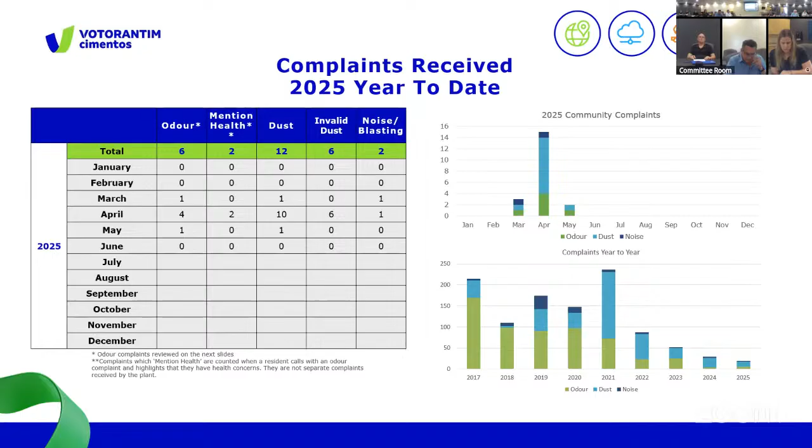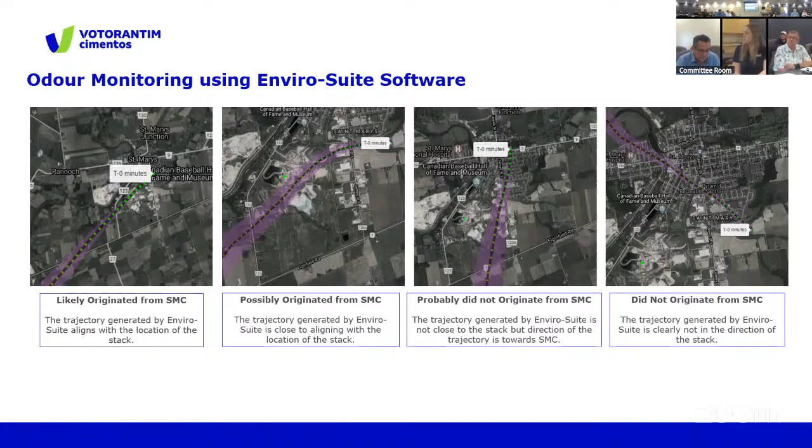Specifically looking at our odor concerns, we are still using the Enviro-Suite software, which helps us validate concerns received by residents when it comes to odors. The software will categorize them as either likely originated from our facility, possibly originated from our facility, probably did not originate from St. Mary's Cement, or just generally did not originate at all. So on the next slide, the 6 concerns we've received this year.

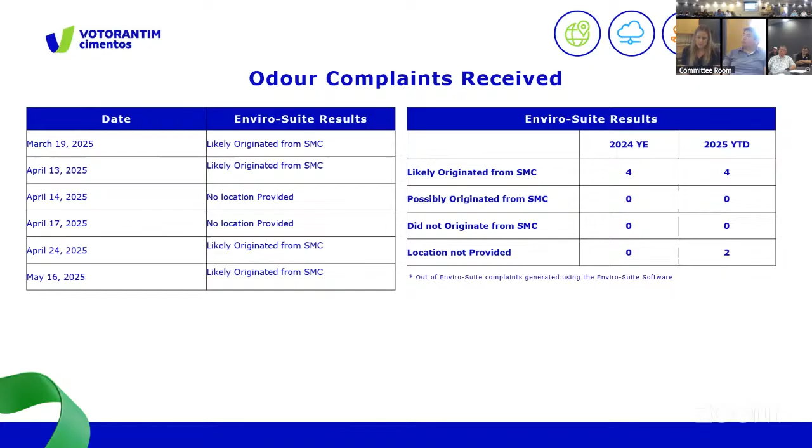The first one in March likely originated; April 13th as well. We did receive 2 concerns, April 14th and 17th, where the resident did not provide specific locations. Just a reminder for everyone that anyone with a concern should please provide that location, as we use it for the software. Towards the end of April, we had another one likely from St. Mary's, and then in May we had 1 as well, likely from St. Mary's. For 2024, we had 4 for the entire year. For 2025, we've got 4 that likely originated and 2 where they did not provide locations. That's on the next slide there.

It's okay. Just go back a few.

Any questions about the odor concerns? Okay.

Dust concerns: in March, we had one that originated from our facility. April 19th, two that did not originate from our facility. Towards April 28th and 29th, we received a whole bunch that did not originate from our facility. I can't pinpoint what it was, but there was a lot of farming and dry weather within that week period. On the 29th, we had 3 that originated from our facility. We also had an event we noticed on that date, so that was a fairly evident one from us. Then towards the end of April, start of May, we had one that was a combination of our material with other material that was not ours, but we worked with the residents for that one as well.

Comments about the dust concerns? Okay.

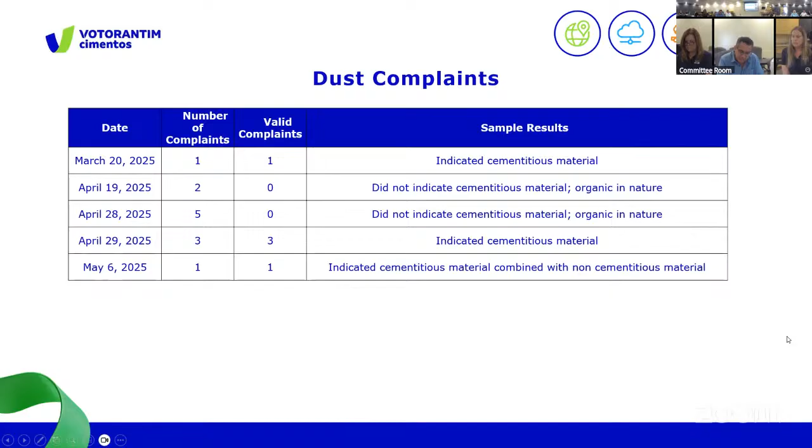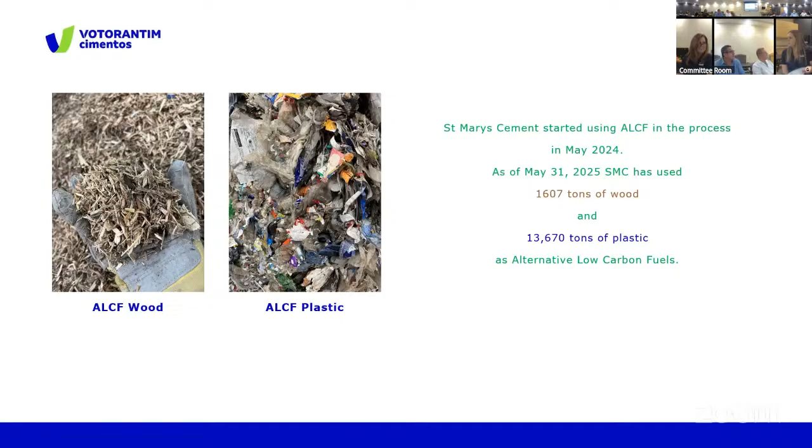Alternative low carbon fuels. As a reminder, we started using these fuels May 2024, which means we've been using them for a full year. As of the end of May, we have used 1,607 tons of wood and 13,670 tons of plastic.

On the next slide, I updated my calculation. I was using engineering practices math, but then I was able to count the trucks, so this is a more accurate number. We've used 647 trucks worth of plastic and 57 trucks worth of wood. Again, these are materials that are sorted, separate from the recyclables. These are materials that are non-recyclable or reusable, and they are sent to our facility to be diverted from landfill.

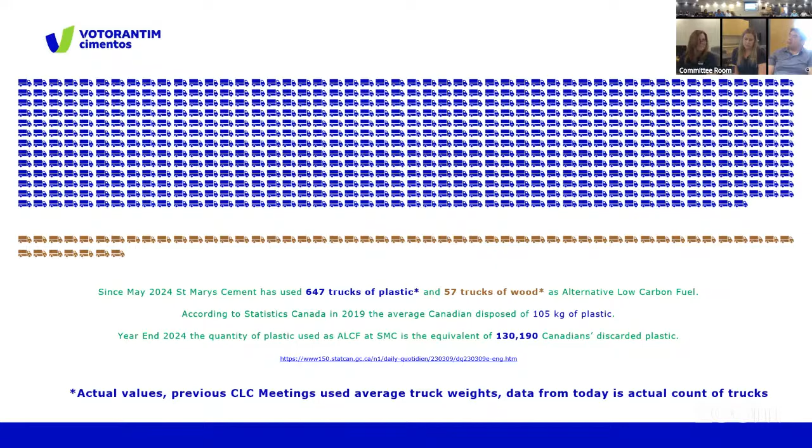On the next slide, we have a new graph. According to Statistics Canada, in 2019 the average Canadian disposes of 105 kilograms of plastic per year. So looking at the full year that we've been using alternative fuels, we have used the equivalent of 130,190 Canadians worth of plastic material. I put this in a different format because that would be a lot of little Canada flags.

Average Canadian or the average Canadian household? The average Canadian. Wow, and that was 2019 - I don't know if it's changed.

Excuse me, Karen - the number of truckloads of plastic you're using, I realize it's probably more available, but is it the heat value that's there, or is that just what's available, so that's what you're using? I thought you had to make a mix, a certain combination of materials. So the plastics we're receiving do have the heat content we need, and we would typically blend it with the wood. I think it's about the same as pet coke, a tiny bit smaller, but fairly close.

The consistency and quality of the plastics we receive doesn't require blending because it's very consistent - a few variations, but not significant. So we don't need to do additional blending; we just process the material as it comes to the plant. When we need to blend is when we combine with wood, but if not, the plastic goes straight to the system.

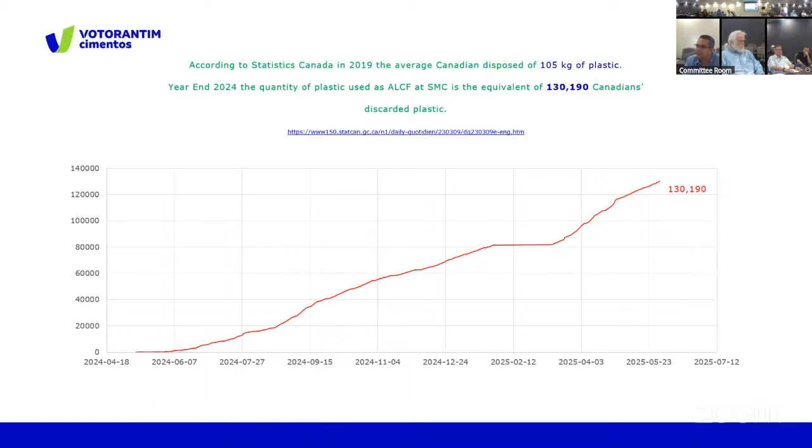So yes, there is a portion of our materials coming in that are alternative low carbon fuels, but in terms of the overall truck traffic, I don't think it's a substantial increase relative to years prior to using alternative fuels. On average we have 5 to maybe 6 trucks per day, and the deliveries are from 8 a.m. to 3 p.m., Monday to Friday. So far the deliveries we're having are no more than 6 trucks per day on average.

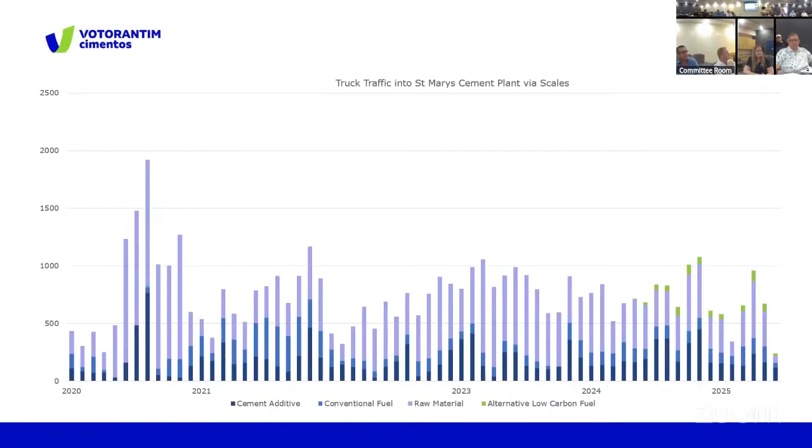Like I said, I'm Jimmy. I've worked for St. Mary's, or Votorantim, for 11 years now. So 9 years in the ready mix business, which is what you guys know as the concrete business, right? And now I'm on the cement division, so working with you guys.

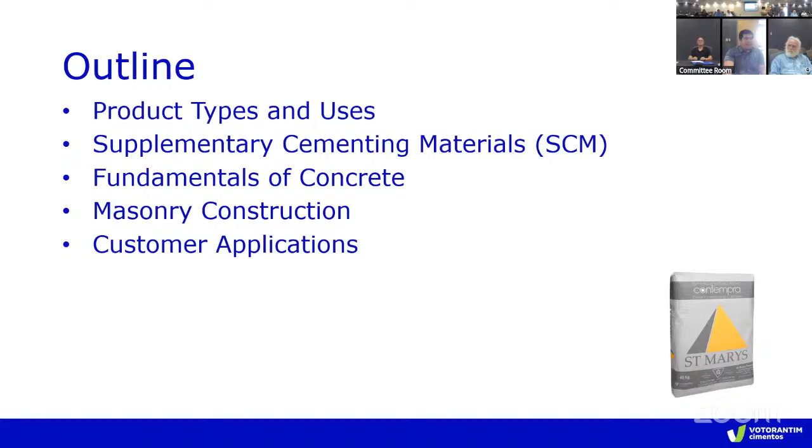Okay, you can skip the next slide. So today, just to outline, we'll go through the product types, the different types of uses, and supplementary cementing material, which is what we use to substitute it. Then we'll go into the fundamentals of concrete, some masonry construction, and some applications that you commonly see.

Moderate sulfate and high sulfate cements are, like the name says, for where it's high in sulfates—your wastewater treatment, your sewage, and such. Moderate heat and low heat is for mass concrete, so big applications like dams, which could be up to 3 meters thick, or any kind of big crane bases. Even other applications where it's really high heat, you might have to use a low heat cement. In Canada, we don't typically have that.

We use supplementary materials to achieve that instead. The other one is your high early strength, which is usually used in precast applications where they need a fast turnaround. The one I don't like to mention is for road work at night—you close a strip, go pour it, and the next day you can drive on it. It's very innovative, but it's also not so nice for me.

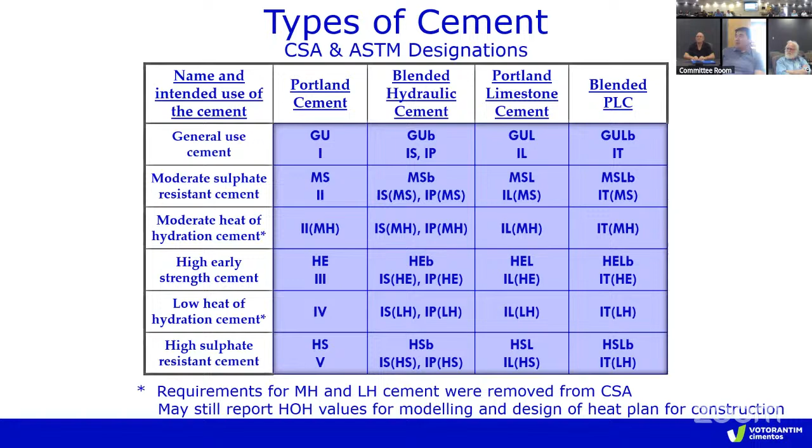Just a quick note on this. We are the only plant in VCNA that produces the 6 different types of cement we need for all these blendings. The other plants we have in Charlevoix, in the US, in Bowmanville, or in Quebec, they produce just 2 or 3 different products. We are the only plant producing 6 different types of products for all these blendings we need to do for the concrete.

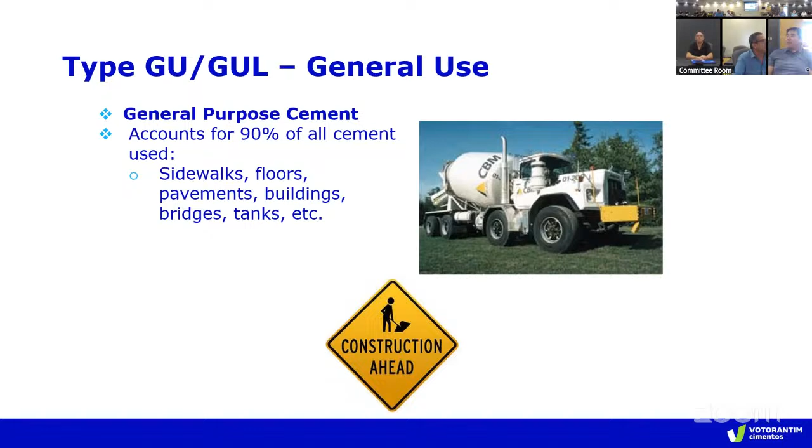So I kind of touched on that. GU covers about 90% of all cement used, right? Go to next.

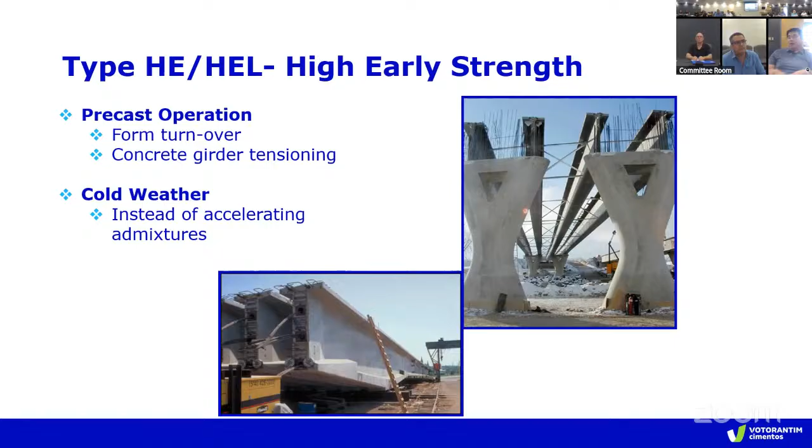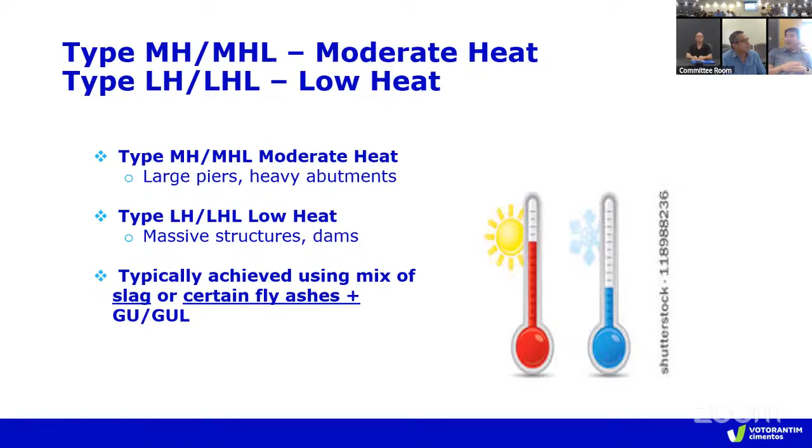High early is used for precast operations. Cold weather is another one too, especially with big condo construction, where you want to accelerate the schedule. Moderate heat and low heat, we kind of touched that as well, and you can achieve that using slag and certain fly ashes with GUL. Moderate sulfate and high sulfate are again just for areas with high sulfates, so it could be for drainage structures, groundwater structures, soil, etc.

So in general right now, supplementary cementing materials, fly ash, are harder and harder to find. Good quality fly ash is harder to find. Slag is very closely tied to our steel industry, and as we convert from blast furnace slag to arc furnace slag, you won't have that slag you can use. So we're starting to try to find, or VCNA at least, yeah I can say that, we're trying to find different ways to continue to be more green. So we're really working on natural pozzolans right now.

Can you just elaborate on what exactly fly ash, silica fume, and slag are, and where they come from? Okay, so go back. Oh, you do have slag.

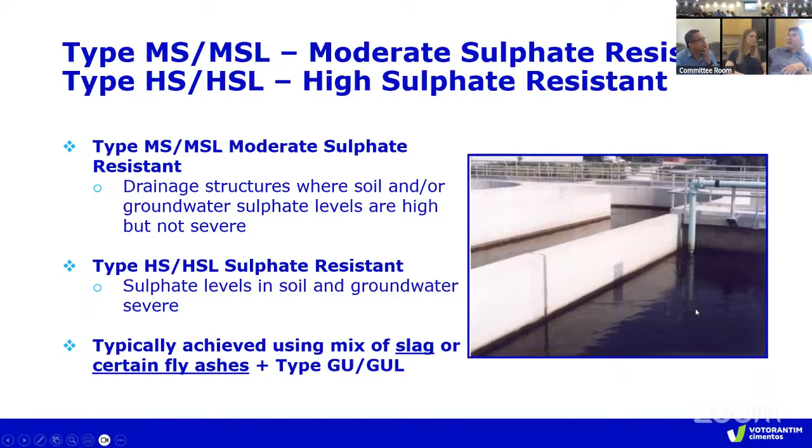Yeah, we have slides. Okay, so fly ash mainly is from the production of coal. The good quality is from coal-fired power generating plants, which used to be mainly found in Alberta and such, where they are burning coal to get power. I already touched on slag. Silica fume, actually, I don't remember where silica fume is from. Do you remember? But okay.

I don't remember where silica fume is from, but it is a byproduct. It's 100% byproduct, right? All these are 100% byproducts, but by using these you're actually preventing things from going to waste, such as our alternative fuels. And you're replacing them in concrete to not only make it more green, but to make it more durable.

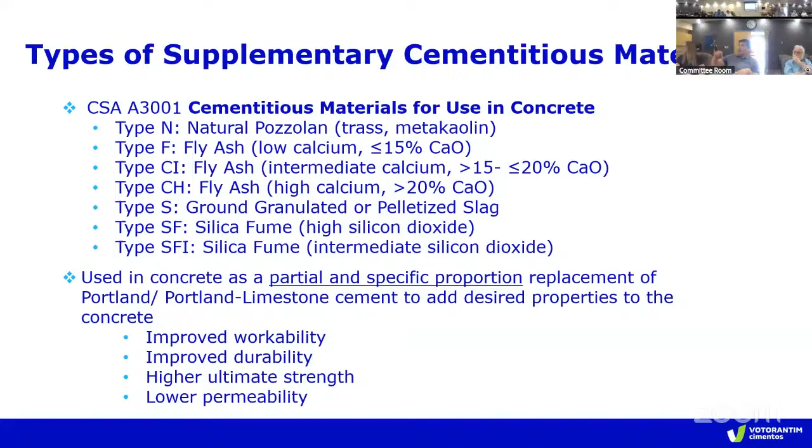Okay, so we go into the next one. So these are a list of all the effects that a supplementary cementitious material, or SCM, can have on concrete. You can have less water demand, or you can have more water demand, it really depends on what it is. Workability is good for a good portion of them.

Bleeding is the amount of water that comes out of your concrete. Setting time is whether it takes less time or more time for the concrete to set. Heat generated, like I said, you can replace with moderate heat and low heat. Pumping refers to putting it through a pump. Color, it does change color, and color does matter to a lot of people. Strength, you do gain more favorable strength gain in later age or early age days, depending on the cementitious material used.

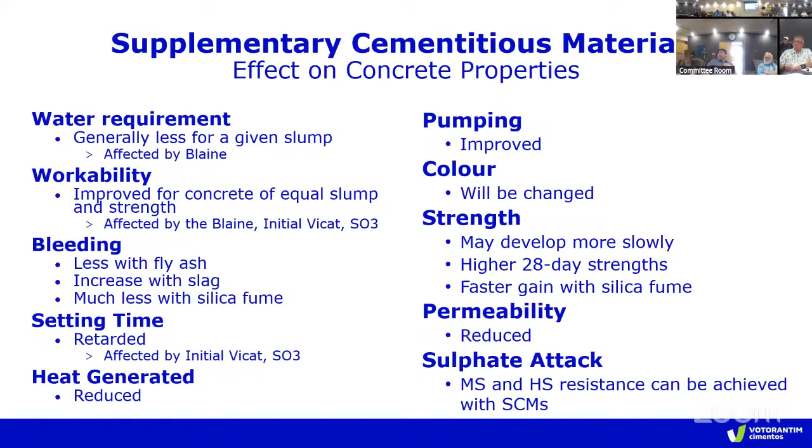Okay, so this is just one of the applications where silica fume was used. It was in the Confederation Bridge from PEI to New Brunswick, where high durability was required. That probably has a design life of 125 years as opposed to a 50-year life. Even the new Gordie Howe bridge has a 125-year design life as opposed to a conventional 50-year one. So when engineers and architects ask us, we need to be more durable, and we need to have things last longer.

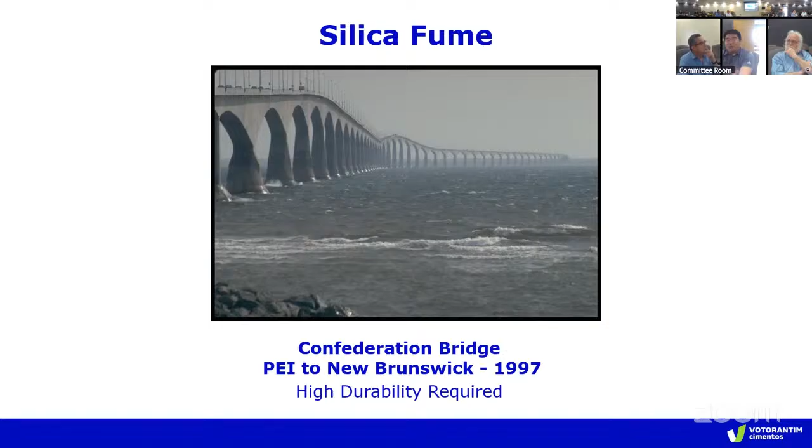Concrete is actually a very good way of being economically friendly because you don't have to tear it down after 50 years, but it's also more durable, which in turn makes it more environmentally friendly.

Silica fume is good because it packs more into the concrete, making it more dense and stronger. That 80 MPa column is one of my projects. Conventional concrete is about 30 MPa, so 80 MPa is almost three times as much. To achieve that, you can no longer use just cement, you have to use other stuff such as silica fume to help increase the packing factor.

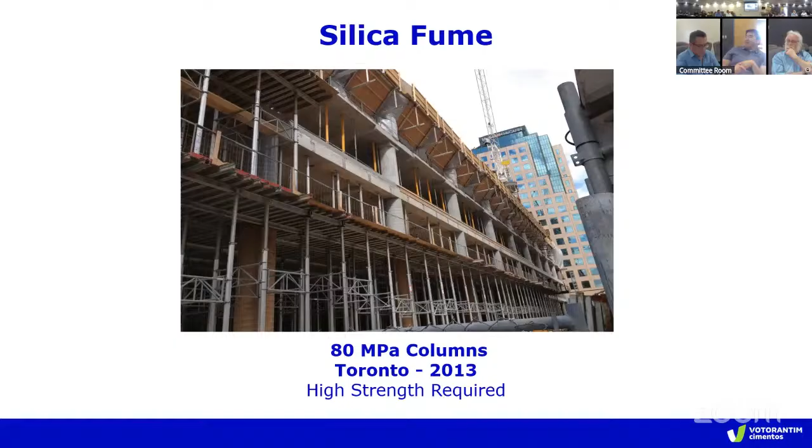Any questions so far? If you have questions, feel free to stop me. I'm trying to fly through this because I've condensed it a lot.

What does MPa stand for? MPa is megapascals, so it's a force over a given area. That's what MPa is, or what you guys know as PSI, same thing. Regular concrete is around 4,000 PSI, so that 80 MPa would be roughly 11,000 PSI, give or take.

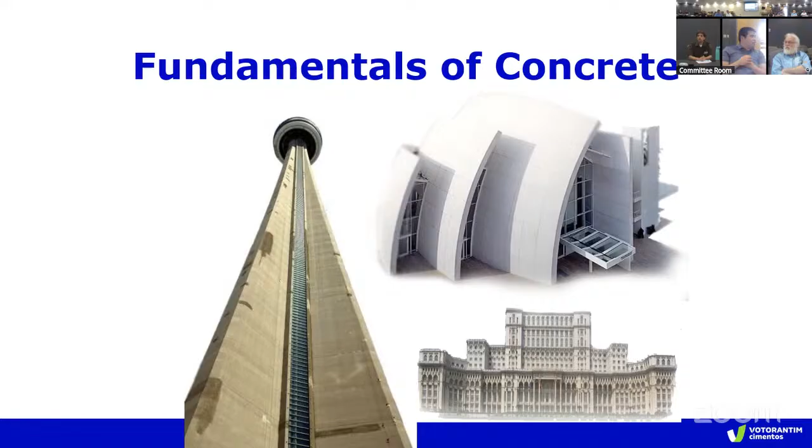Okay, moving on to fundamentals of concrete.

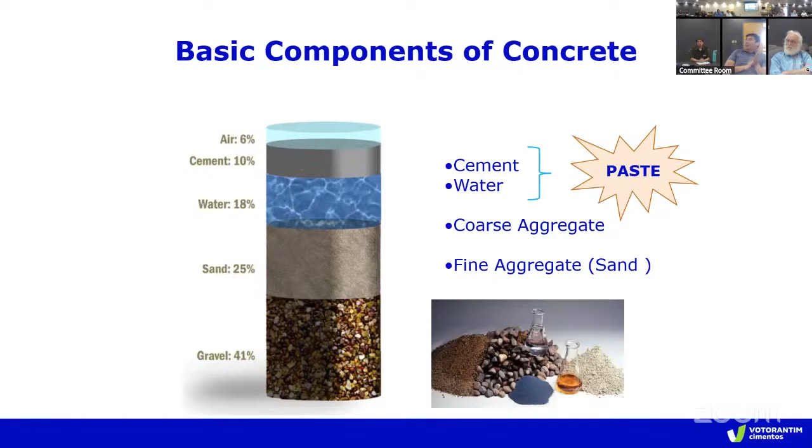When we're designing quality concrete, what are the things we're looking for? Durability is the biggest thing. It has to withstand weather, especially in Canada, it has to be resistant to freeze thaw, it has to be able to withstand de-icing agents. What we use here is sodium chloride salts, there's different types, some are better, some are worse for concrete.

It has to be wear resistant, so if you're designing a road it has to be skid resistant. It has to be adequately strong, depending on what you're designing for, whether it's only a 3-floor house or an 80-floor building, it has to be designed correctly. That's where things like compressive strength, flexural strength, modulus of elasticity come in. You have to really know what you're designing for and what it's being exposed to.

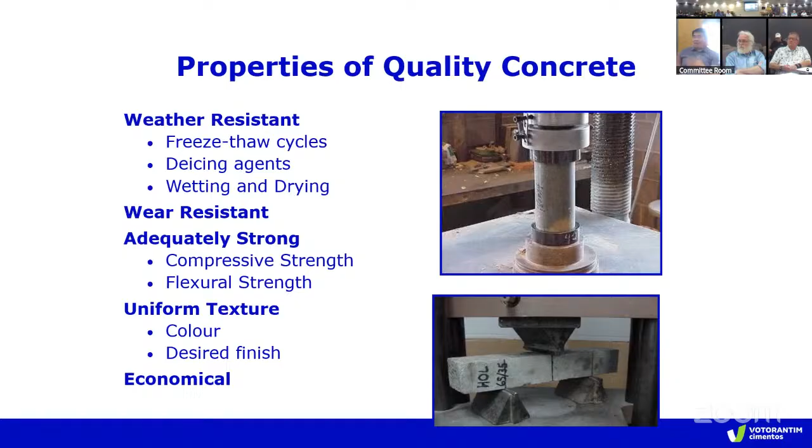So we're talking about the 6 different kinds of ingredients, or 5 main ones. Mixing water has to be potable. Recycled water can be used, but it must be tested and free of any impurities that will affect cement hydration.

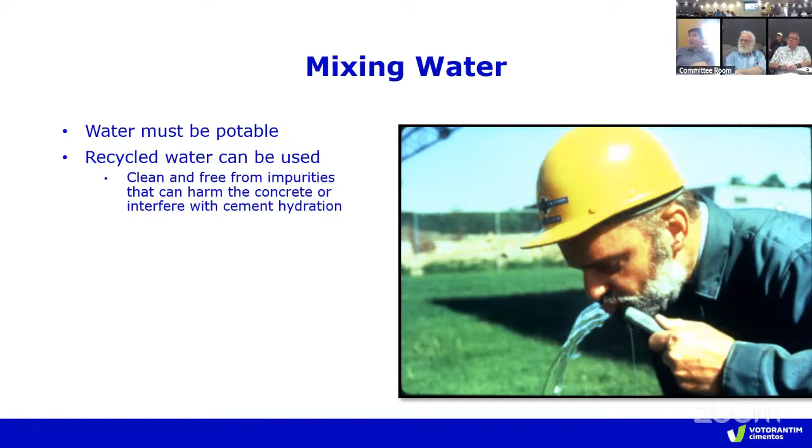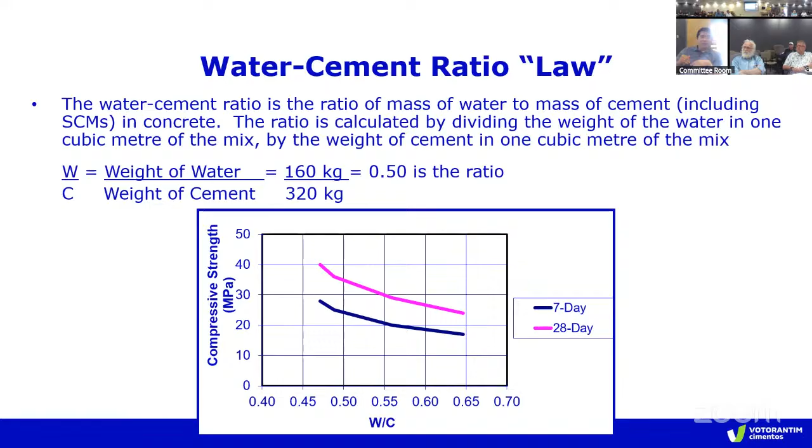You add water? By adding water, you're increasing your water to cement ratio, so you're making it weaker. Concrete's a very finicky thing and it has to be treated the right way for it to work the way it's intended to. Workability is better in the short term because they can handle it better, but it's going to have a high impact on the performance of the concrete in the long term. So even though it could be a benefit in the short term, just to pour easily and faster, we are compromising the quality of the concrete for the long time.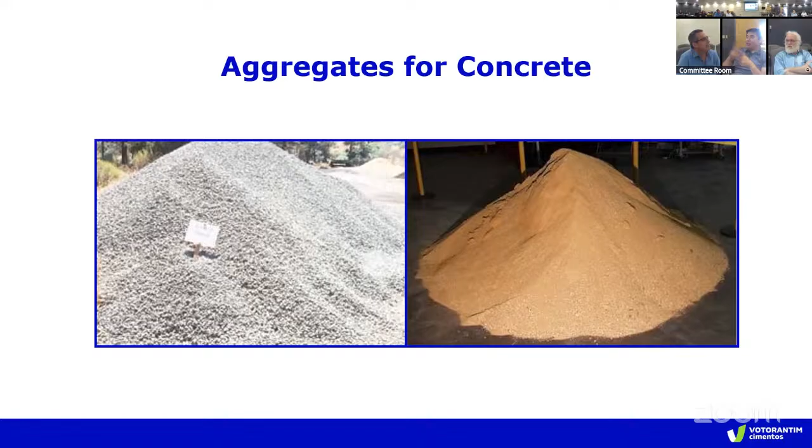So you look at the gradation, optimizing the gradation. Between the sand and the stone, you want to optimize it so that it kind of fills in all the gaps, right? You can use less cement, and you can also make it more workable.

Particle shape, so whether it's round or angular, can affect the ultimate strength of the concrete and where you can go in terms of strength. Surface texture, rough and smooth, same thing, whether it's round or angular. Strength would be kind of based on the angularity or how round it is. You look at that bond in between. In general, more surface area, the more rough it is, the stronger the aggregate paste bond.

Abrasion resistance is, if you're going out on the roads and stuff, how resistant is it to abrasion? If it's losing all the abrasiveness, that's not good for roads, it makes it harder for us to stop when we're driving. And the last one is freeze-thaw durability, so you don't want your aggregates to be too absorptive, so that they don't absorb too much water, because that increases the stress inside the aggregates.

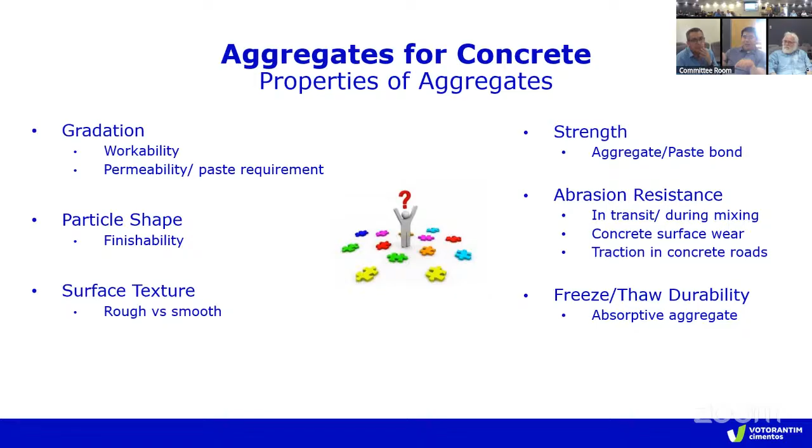Next please, so admixtures, there's different types of admixtures. Next slide. In general, we're only going to touch on a couple. So the air entraining admixture, so it's how you put more air into your concrete. We'll touch base on that.

Water reducer, so we put more water reducer in there, to reduce the amount of water that you need in your mix to perform, so that really helps us with the water cement ratio. Retarding admixtures give you more life to just work with your concrete. And accelerating admixtures, so how do I make the concrete gain strength faster, how do I make it set faster?

Yeah, so there are maybe other ones outside of these, such as the shrinkage reducing admixtures. There's the VMA, the viscosity modifying agents. Just different ones that are out there to affect different concrete properties.

Excuse me, sorry, go back, I was going to ask, what does more or less air do in concrete mix? I will explain that in like a minute, I'm ahead of you, sorry. It's okay, I like it.

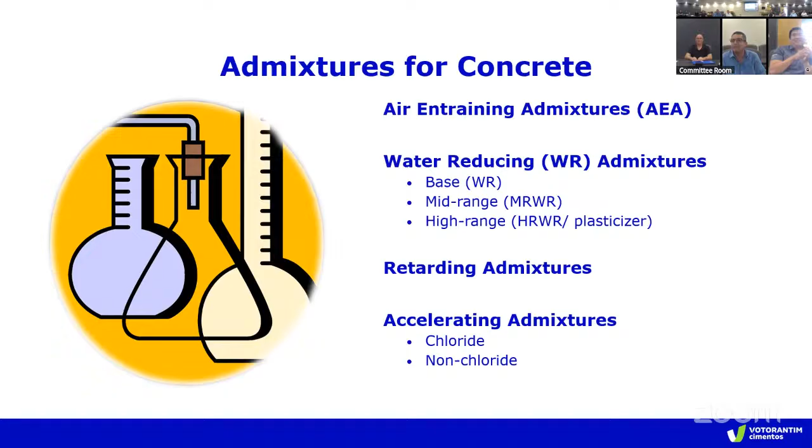Next please, so air entrained concrete, we'll talk a little bit about this. Next slide please, and this is the slide I want. So this is kind of a microscopic level of what happens.

You want air inside your concrete because it acts like a pressure release valve. If you only have a hole and you fill it with water and you freeze it, what happens when you freeze something? It expands. That's what I meant, right? Putting air inside your concrete lets that expand, but also doesn't put pressure in your concrete. Concrete is very weak when it comes to flexural strength or anything that's pushing from the inside. It's really good when you try to compress it, but it's not good otherwise. So when you're putting in concrete, you want to design it so that there are areas where there is, I guess, agents or reactions to happen and to grow into. Does that make sense?

The one on the left is the hole where it's not frozen, and the one on the right is where it's frozen, so all that excess water from the reaction is going into the hole, relieving the pressure in the system.

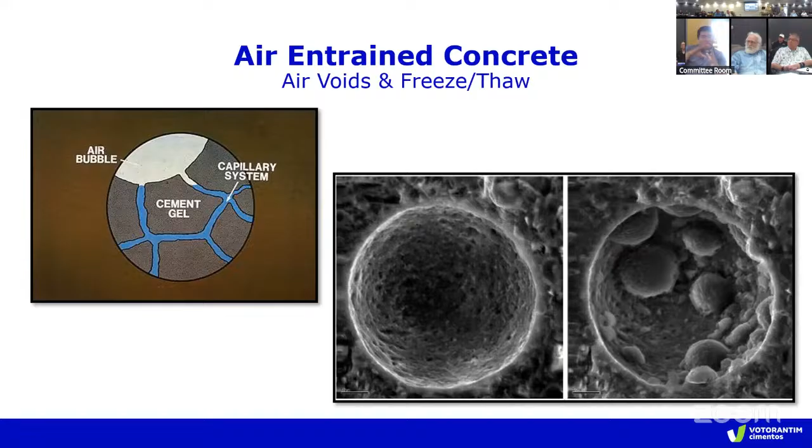Air entrained concrete can also affect other properties. It can increase workability, reduce segregation, reduce bleeding, and finish sooner. It reduces required sand content and reduces water. The hardened concrete is where it matters more.

It makes concrete more freeze-thaw resistant by 10 to 20 times over non-air entrained concrete, because we're taking that pressure away from the concrete. It also improves resistance to salt scaling, which is tied to freeze-thaw and the reactions happening, and the same applies for sulfate attack, because you have different reactions happening and you're giving room for it to grow inside.

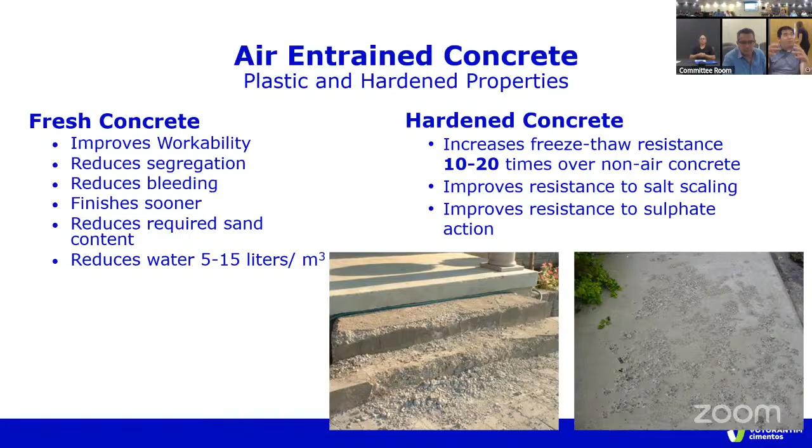So, exposure and durability.

Quick question, maybe you'll answer later. When we prepare the concrete at the ready-mix plant, do we have a time to deliver to the customer? Like 2 hours. By CSA it's 2 hours, by MTO you have 90 minutes, depending on. So when the mixer is leaving the ready-mix plant, it only has 2 hours to deliver—not from when it leaves the plant, but from when the water and the cement touch. That's the reaction, and that's critical, because you see a lot of ready-mix plants everywhere. It's because the distance from the plant to the construction site should be within the radius to achieve that delivery time. If not, you will compromise the quality of the mix that you are giving to the client.

Now I'll add one exception: if it's a high ambient temperature, like 30 degrees outside, what happens when you increase the temperature? Your chemical reaction happens faster. So the reason for the 2 hour restriction is we want to give it enough time before the reaction kicks off.

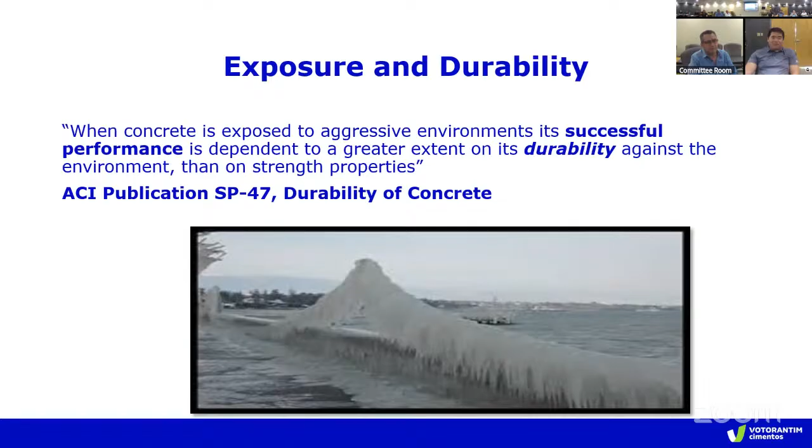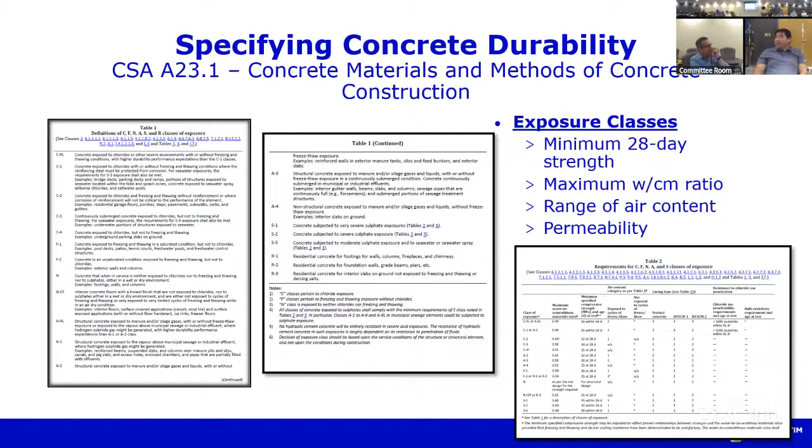So, specifying concrete durability—these are technical sheets. The left sheet covers different applications, and the left column tells you what kind of exposure class it is. Based on the exposure class, you look at your water-cement ratio, your minimum 28-day strength, the range of air content, and permeability if applicable.

When you're looking at concrete deterioration, these are examples of different kinds: AAR, alkali-aggregate reactivity, and sulfate attack. There are two main types—one is just expansion of your concrete, the other turns your concrete into mush.

Physical, we talked about freeze-thaw, corrosion, right? Corrosion inside your rebar - as it corrodes, one area is thinning out, the other area is expanding. Thermal, abrasion, cracking, and shrinkage.

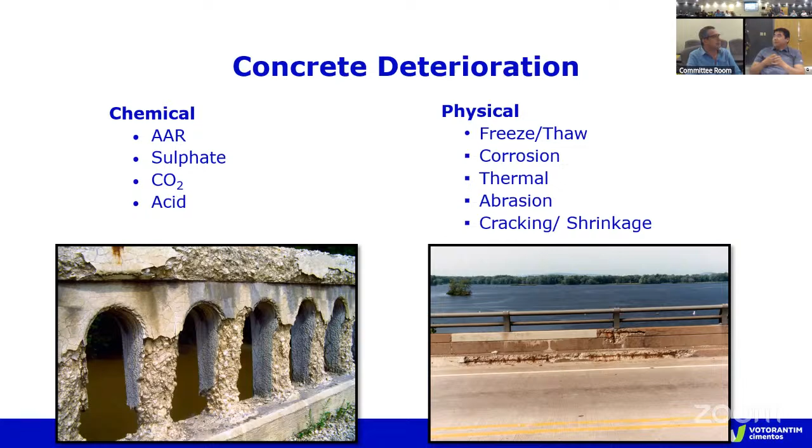Just on quality of the materials, we are not just talking about the quality of the cement in the mixture. You explained to us that we have 6 different elements in the mixture. It should be good quality in all of them, including the water and all the other aggregates, because you can compromise the performance. Even though you have good quality in the cement, if you don't have good quality in the other 5 elements, you can compromise the quality of the mixture.

A very good point, right? We talked about aggregates earlier. If the aggregate is not clean, has some kind of contamination, it will compromise totally the strength and the quality of the mixture. So that's the reason we need to take care not only of the cement, we need to take care of the other elements, part of the mixture as well.

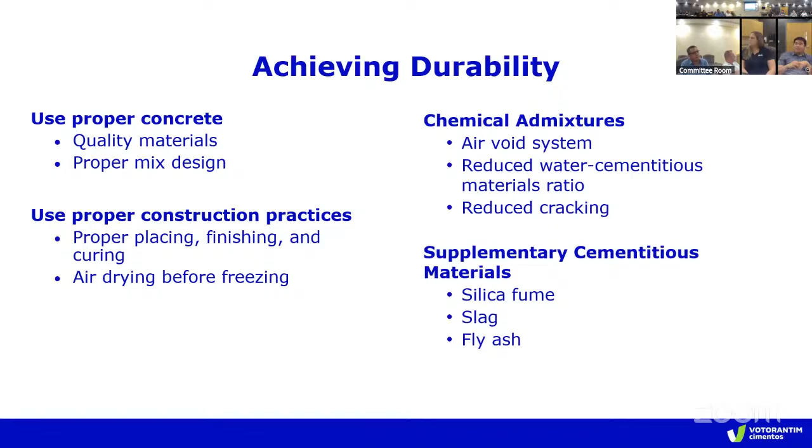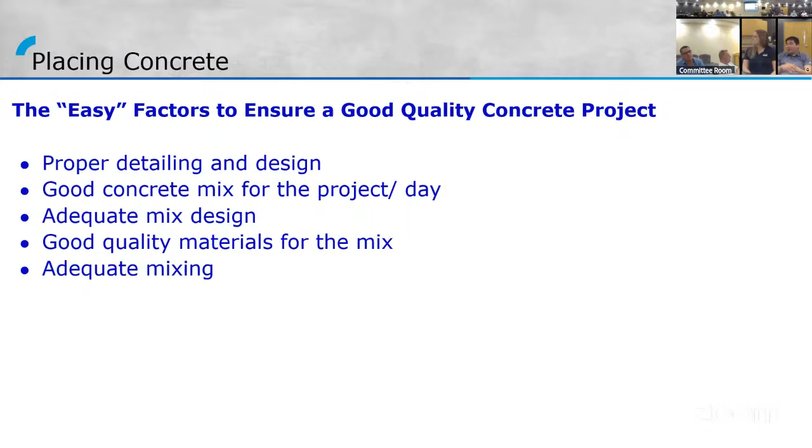So at the job site, concrete is the only construction material that is delivered to the job in its unfinished state. If you think about anything else delivered to the construction site, it's all finished. We're the only one that's not.

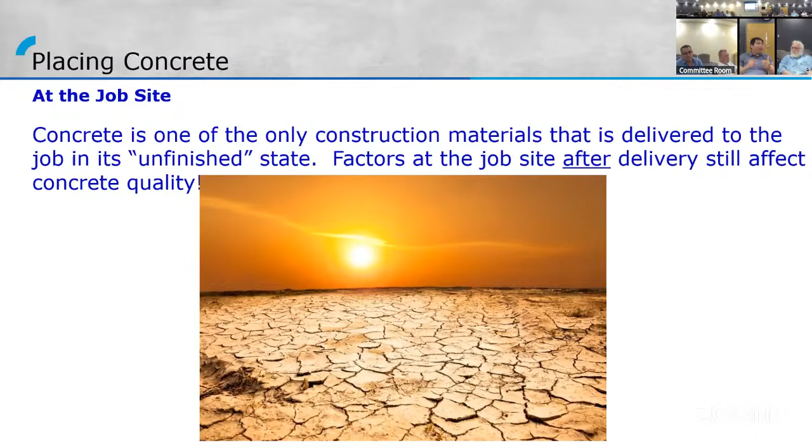So you go there, you place it, you wait for it to be in its finished state. But even then, it's not technically in its finished state, because you've got to wait 28 days or until it reaches a certain strength before you can continue building on top of it.

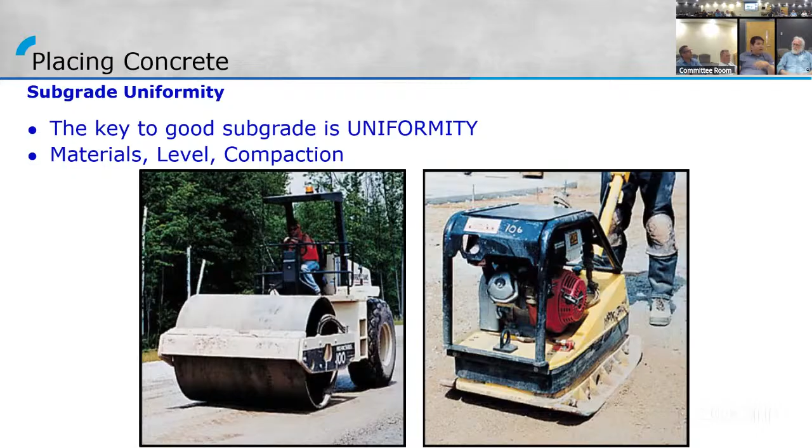So I talked a little about subgrade uniformity. You have to make sure that the bottom is good enough for it to sit on. If it's not level, if it's not compacted properly, the weight of the concrete, which is pretty heavy, will change it. And concrete's not good at taking those tensile strengths, like flexing, so that's when you're going to have those cracks - that's when you're not going to have durability in your concrete anymore.

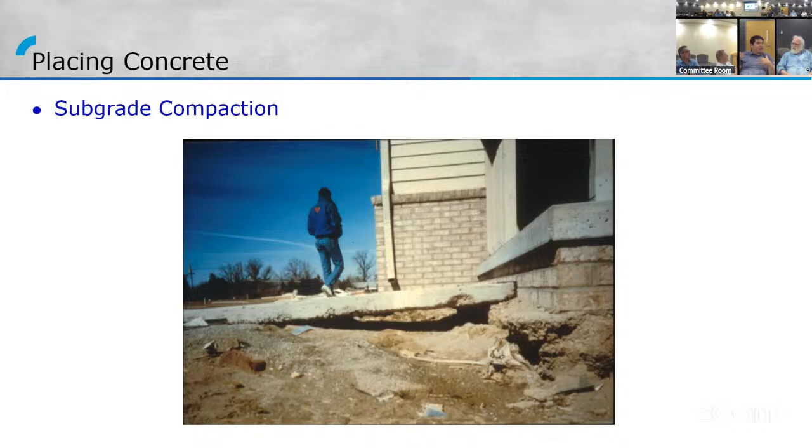So something like that - if you put more weight on that than the person can bear, that's how it's not good, it won't take a lot of force, right?

Moisten your subgrade, this is important, especially on a hot day. You want to have this so it doesn't take water away from your concrete. If your concrete is not drying at the same rate on the bottom and the top, that could be not good. If you go to winter, if it's cold and the top is hot, as soon as you pour it, the bottom part will not set properly because it's losing too much temperature.

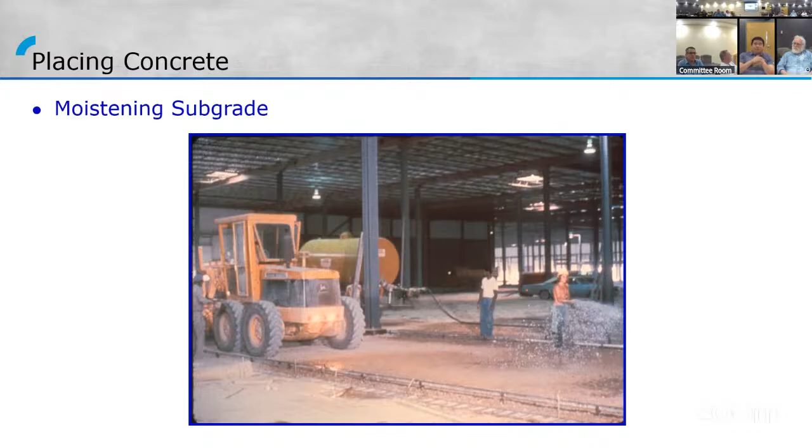So details, you can't see it in this one, right? But what are details? Details are essentially you put in joints inside your concrete, so you control where you want your concrete to crack. But if you don't control it, you're gonna have cracks all over the place. You're not gonna be happy, and it's not gonna look pleasant.

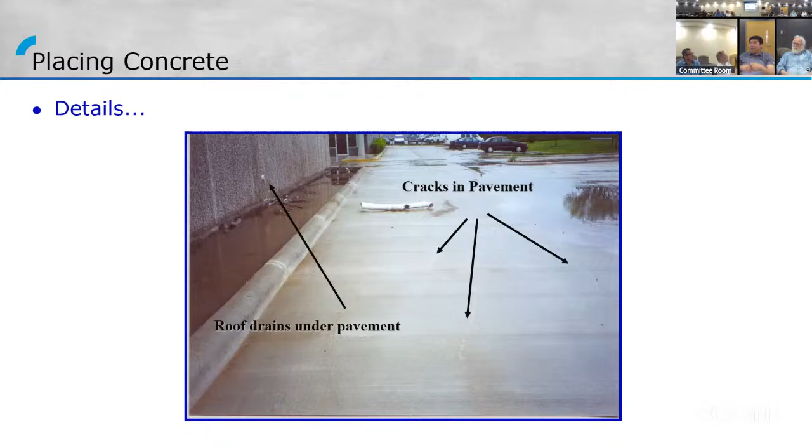Just some general guidelines. Place as soon as possible, preferably within 2 hours. Place concrete into concrete, so it kind of tells you how to distribute it. There's different types of methods, whether just off the truck, using wheelbarrows, using a pump, and so on.

Strike off the concrete to finish grade using a straight board on edge between the forms using a sawing motion, just to have a flatter surface finish, and then smooth the surface using a long-handled bull float. This is for just the regular slab here.

Just a side topic, because we're dealing with it a little bit. If you're seeing someone on a driveway or someone on a sidewalk and they're using a steel trowel, that's a big no-no. It makes it weaker, makes a dense surface, and it makes it weaker. You may have durability issues down the road.

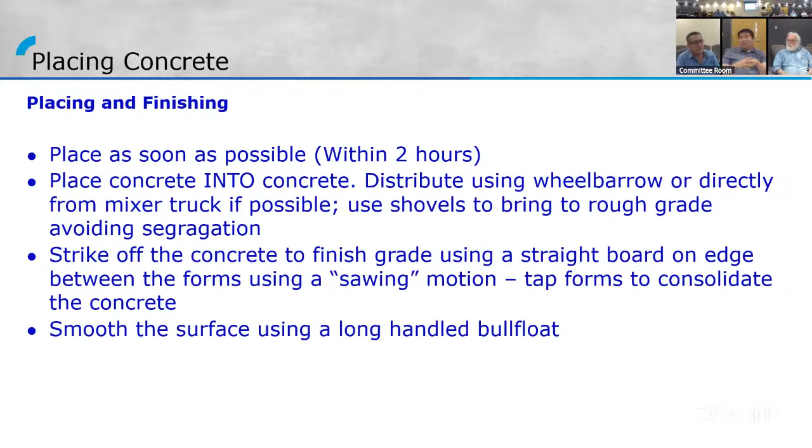Okay, so placing it this one way, straight off the truck into the forms, ready to go back and forth, truck moves forward, fairly straightforward.

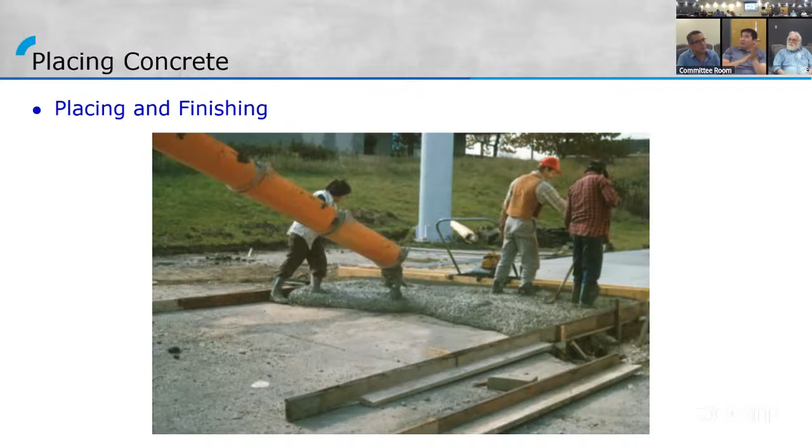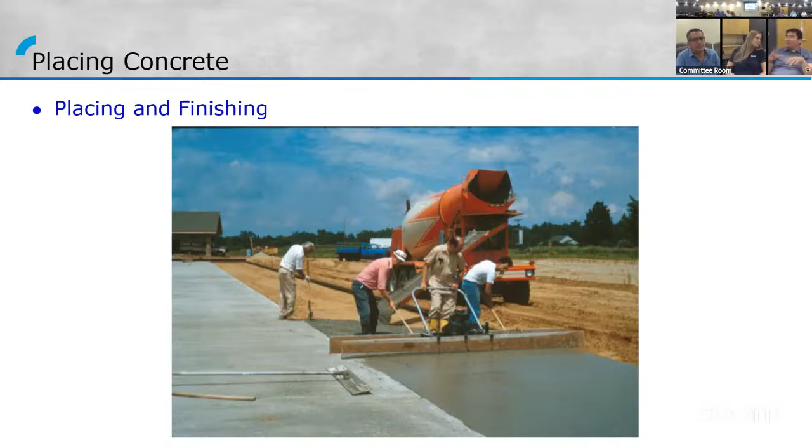Same thing here. Walking around it doesn't affect it too much? Those guys were standing in it. Well, you have to go and consolidate it afterwards, right? So walking around it doesn't cause enough movement to disturb it, generally.

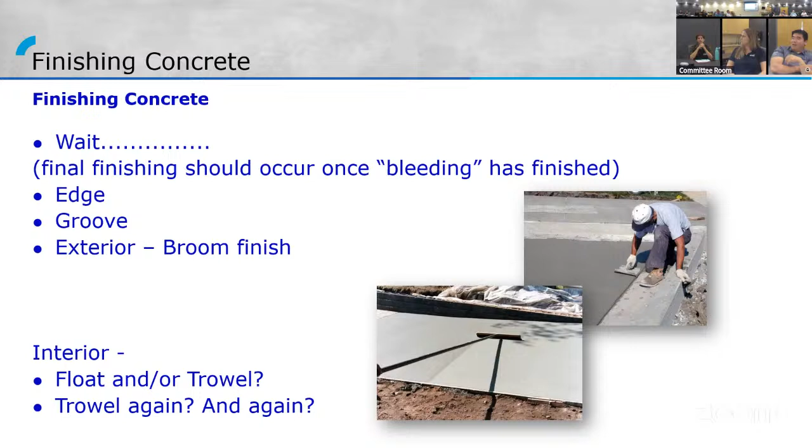So finishing concrete, you have to wait before your final finish. You have to wait till all the bleeding cures. You've got to finish your concrete properly, so edge groove, and then do your broom finish. If it's interior, you do your float or your trowel again and again to get the finish that they want.

Next one, just examples of finishing.

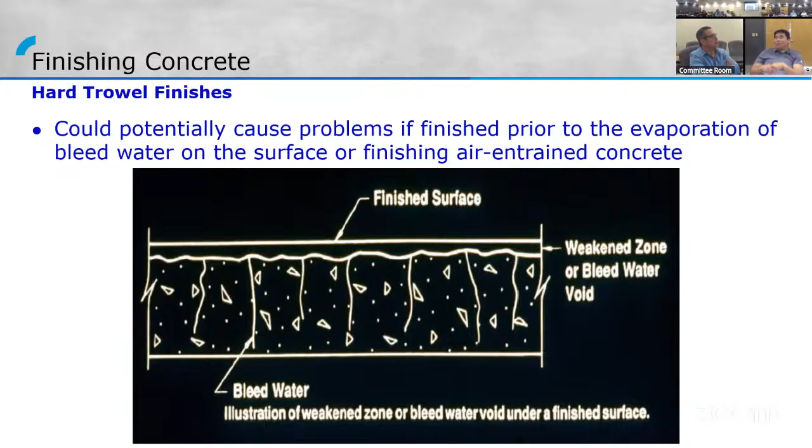When we're talking about this, I talked about that earlier, if you don't let the bleed water kind of go out, or if you're using a steel trowel, it makes that top surface just like a weakened zone. So that's what happens up there, and then if the water cannot get out, or if the air creates pockets, then you're gonna have a weak surface, and that's when it starts peeling. So if the top surface is peeling, it's not very aesthetically pleasant. It's not detrimental to the structure, but it's not visually appealing. So someone's always saying something's wrong with my concrete.

We talked about water cement ratio, and another thing that can affect the previous slide is a thing called blessing. It's even if someone takes a brush, puts it in the bucket, and starts blessing the concrete, going around, throwing the water on top. And what does water cement ratio do to your concrete? It makes it weaker. So by blessing your concrete, you're making the top weaker.

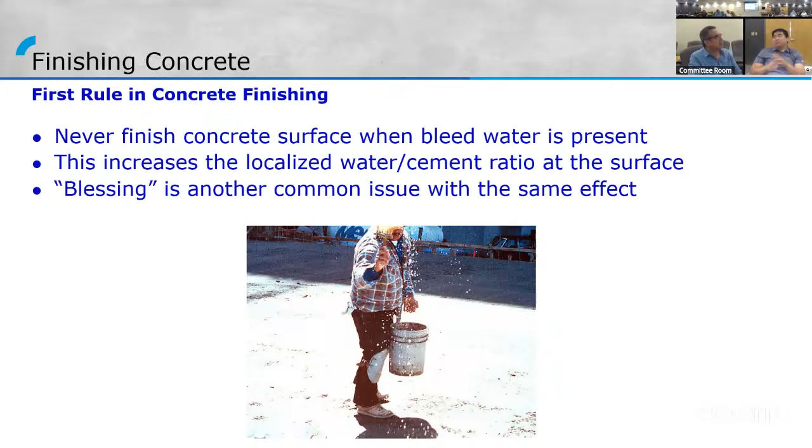Curing concrete, this is probably one of the most important things. If you properly cure your concrete, it makes it durable. If you don't, it can crack, it cannot gain strength, depending on the time of year. If it's in the winter, below 4 degrees, your concrete is not getting any strength at all. At 10 degrees, it slows down, actually probably slows down at a higher temperature, like 15 or so. 10 is really affected, 20 is probably where it should be, 20 to 23, that's ideal for concrete strength gain.

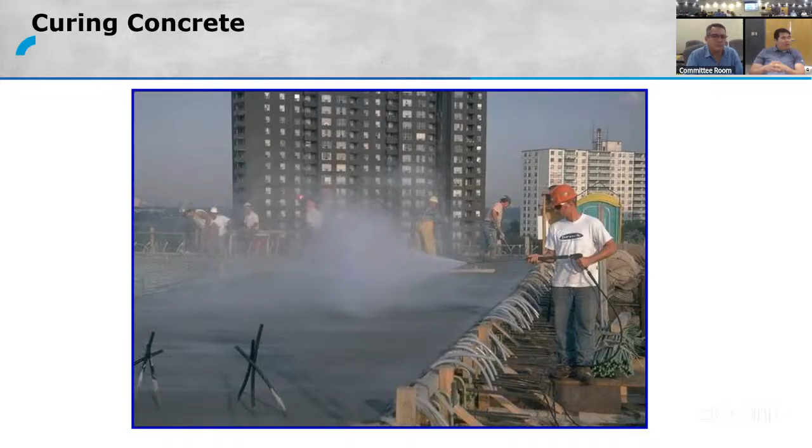So what is curing? It prevents the loss of moisture from the concrete and maintains favorable concrete temperatures, and it should say humidity as well.

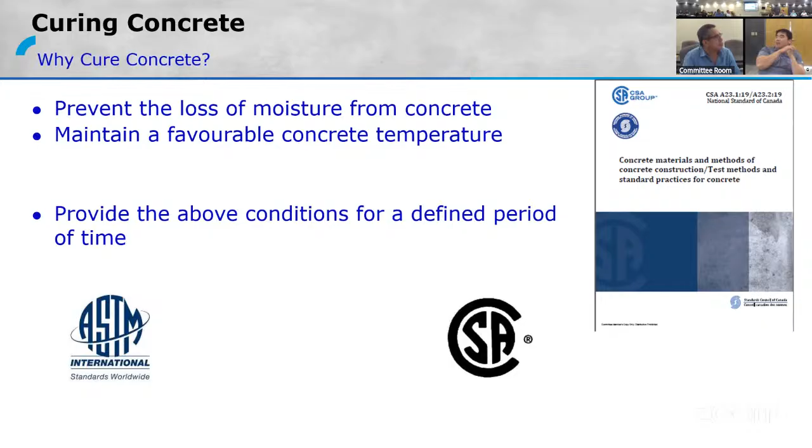Curing concrete is not just making sure that it's moist. You're also preventing it from freezing, high temperatures, and premature drying, as well as moisture loss. Those are kind of the minimum requirements, and then there are the ideal requirements.

I was listening to someone say they poured a driveway at their house, and the city reached out to them 7 days later saying they thought there was a leak in their water pipe, but that was actually him curing his concrete properly. Now, how many people are getting those complaints? Probably not a lot.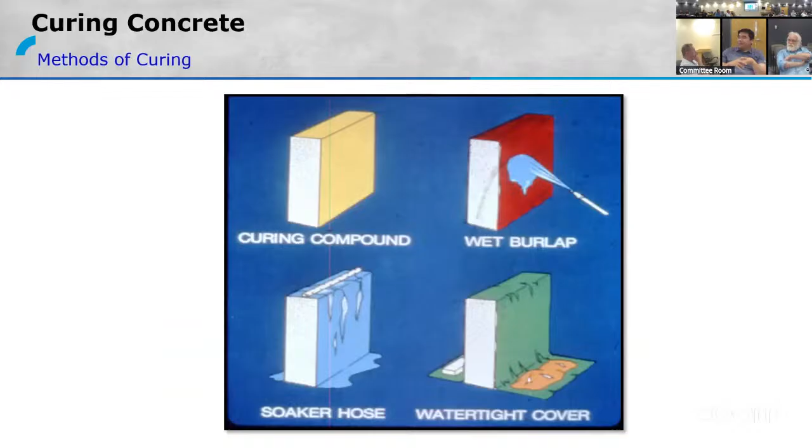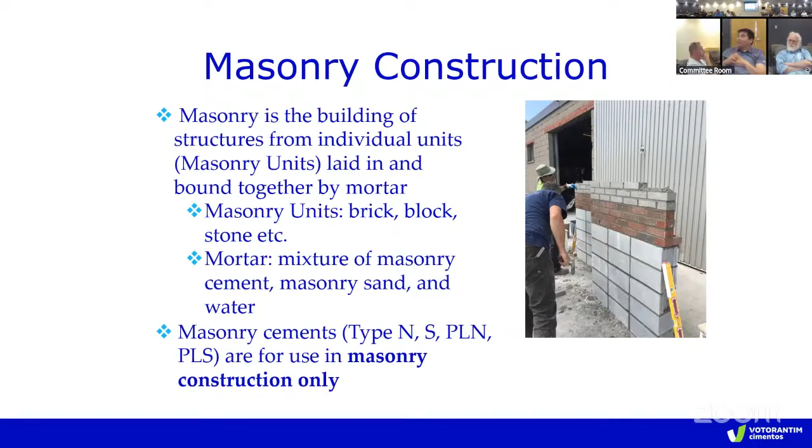Masonry construction: this is where we make most of our masonry cements, our type N, type S, type PLN. Those are for masonry construction only. These are pictures from our yearly masonry trial, just to see how our products are performing when used by masons. I'm very proud to say that St. Mary's has a good reputation in the masonry industry.

Some customer applications: ready-mix concrete is when everything is mixed inside either a drum or one of the ready-mix trucks — the trucks with the big drums on them that turn. So it's either in the drum, put into another drum, or placed into the truck itself.

Mobile trucks are for much smaller applications. They can't carry as much as the ready-mix trucks, but you're able to do small patches.

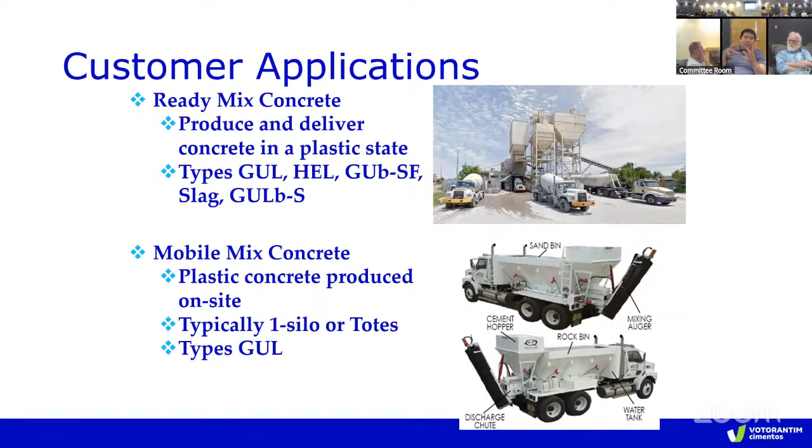We also talked about precast concrete — things like stairs and concrete pipes. And the last one would be concrete blocks and pavers, like bricks and patio stones.

Just one comment on the previous slide: for precast, we use concrete that achieves strength at early stages, because that helps the productivity of the companies. That's the reason we have the high early limestone and SF, because that quality and those specifications in the cement allow producers to be more effective. They don't need to wait many days to achieve strength — they can achieve it in the short term and then produce more precast products. That's one of the specifications for the high early limestone, and the reason we have those special products to provide solutions to customers who need these strengths in the short term.

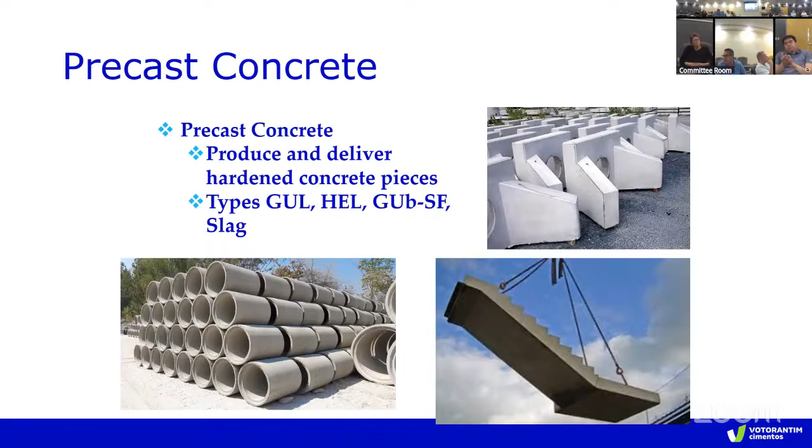Just a couple of projects our company has worked on: the Gordie Howe Bridge — is it open to the public yet? It should be almost open, right? It's not open just yet, I think they're just working on the approach still. But that's one where we had to use a lot of very high-end material we call GUb-SF, that's GU plus silica fume. A lot of it is designed for a 125-year lifespan.

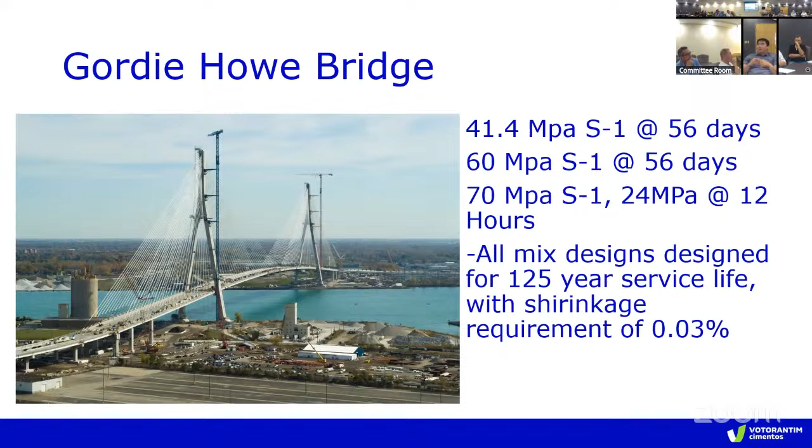The Crosstown LRT is another one I worked on — very high supplementary materials, with many different requirements. It has to be waterproof, fire resistant, have extended workability, and meet shrinkage requirements. You name it, they probably thought of it.

To throw out some other projects, outside the company we worked on Ripley's, the CN Tower, most of the tall condos built in Toronto, and the new Buffalo Bills Stadium. We're involved in a lot of high-profile jobs, and it's very nice to see what cement and concrete can do compared to what it could do, say, 50 years ago.

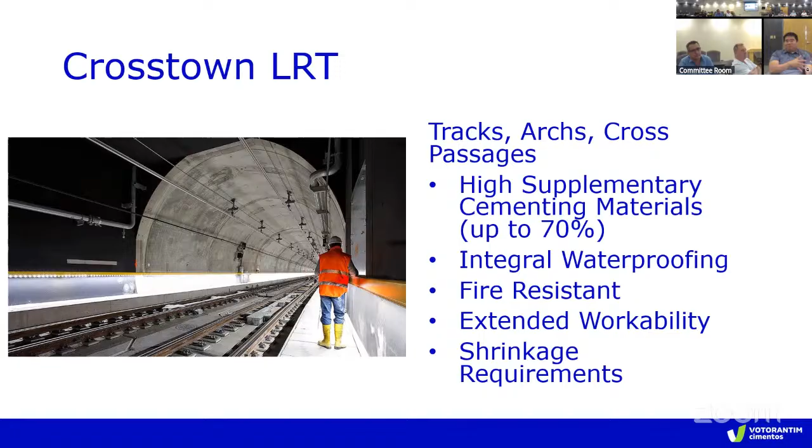I think that's it — any questions? One question was: we deliver an unfinished product and sometimes need to wait up to 28 days. How do we track as a company the performance of the concrete we deliver to confirm we're meeting specifications? In general, you have your field samples.

I'm a little more involved with it now, so it starts with the cement plant, actually even starts in the quarry. Quarries have to make sure the aggregates are inspected, we make sure everything's inspected here, making sure the strength's good, and when we go out there, we make sure everything's being used properly and that it meets our design.

So there's a machine or tool for once the product's in place to check how it's progressing? We don't do it in place. I'd take a couple cylinders, fill them with concrete, cure them properly, bring them back to my lab, cure it properly, and then after 28 days I put it in a machine where it just squeezes until it blows up. Well, it depends, sometimes it blows up.